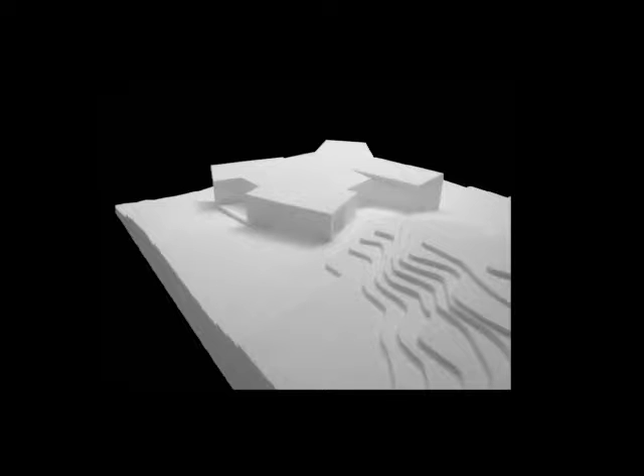But the idea of containers was always present in the project. Starting from this idea of containers, and at the same time the place which had a huge slope, immediately the house gained two faces.

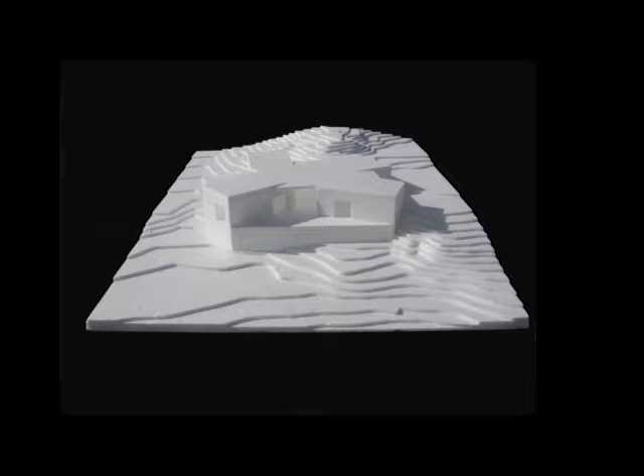One where the containers actually go inside the site, and the other where there's a balcony that connects these containers, and that makes, in a way, the image and gives a unit to the whole building. So this is more or less the idea of the containers.

But moving forward, as we had lived on the island and had this strong experience of the elements, we are completely in the middle of the ocean. We can have winds of up to 200 kilometers per hour, which is very strong. An interesting thing was that people around the islands know how to deal with the elements. For instance, when there's a strong wind from the north, people, when fishing, can always walk around the island and find a nice, calm bay that will be protected even if there's a strong wind from the other side.

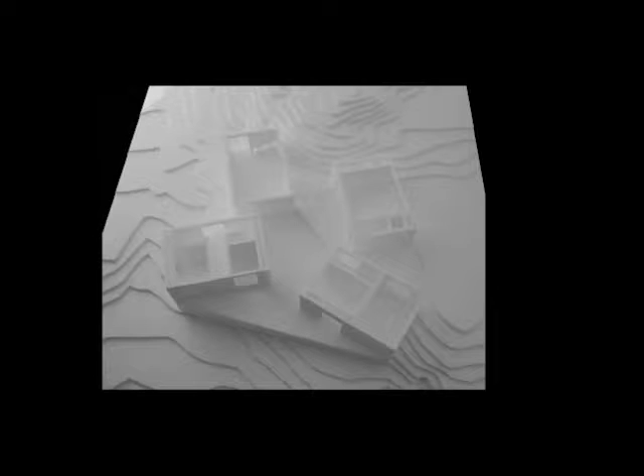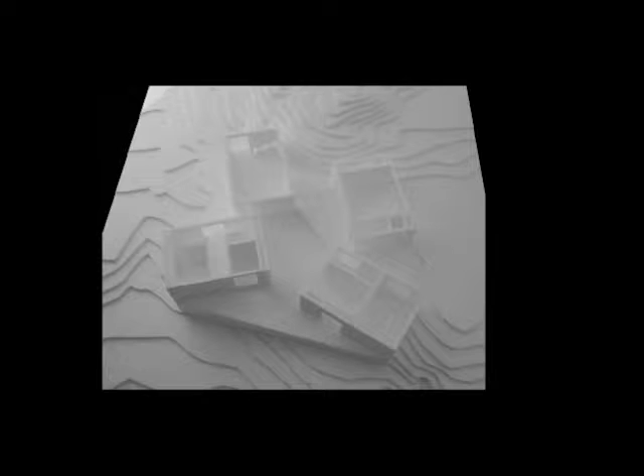So we proposed to our clients that we would build their containers, but the social space of the house would be the central area, and that this central area could be open towards the four sides according to the relevant wind. So it was an idea of being protected and being connected to the exterior, and this was the way we dealt with the containers.

But as I said before, it was very important for us that the house belonged to that place, and we had this in mind when we were drawing the plan: traditionally, old constructions were, for technical and functional reasons, arranged around like a street. They are always small constructions that, although in a completely rural context, the way they are arranged makes almost like a small urban system.

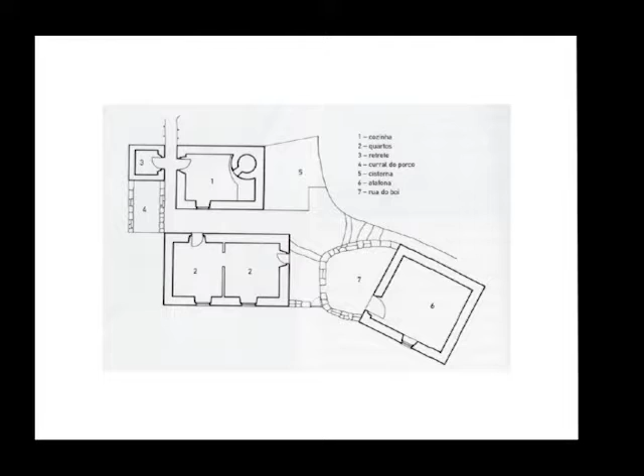They even call these in-between spaces streets, and there are functional rooms apart from others, but the whole ensemble of buildings makes a very coherent, almost urban structure. So the plan isn't so relevant on its own, but it's putting in a concrete way what we proposed to the client.

So the social area inside, the rooms for the kids, the main room, and the kitchen. Also an office was important, as he was a dentist, and the wife said that normally people, since the island is very small, would knock on their door for a small appointment even when they were at home. So the idea was that the office was closer to the entrance, so people coming to the house wouldn't enter their privacy.

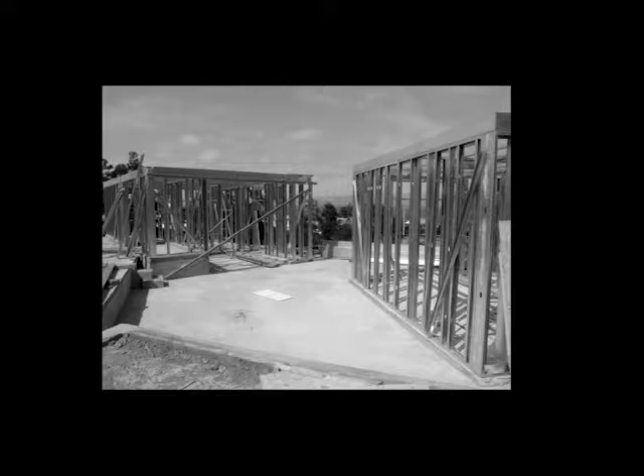This is just to show you what was, from our research, the possible prefabrication system, which was like light steel framing. This was actually good for the project because it allowed us a degree of detail that was in a way closer to how the dentist client works. So it was really possible to make the size of the volumes very exact.

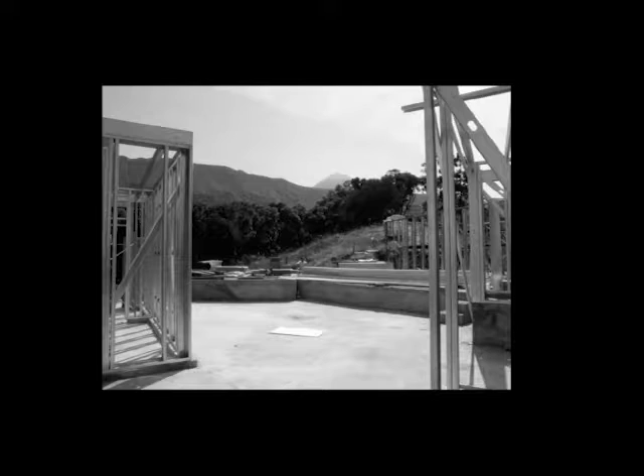Finally, all the torsions and movements that the buildings have are related somehow to the views that the client asked for each compartment. There was this kid who wanted his view toward the mountain, another who wanted to see the sea, and the wife wanted to see a particular part of the island. All the movements you see on the plan are actually trying to respond to the client's wishes.

I guess the interesting thing in this picture is mainly the fact that even if you have this prefabricated structure, which is light and dry, you always have the hard part that touches the ground. For us it's totally relevant how the buildings touch the ground—I guess it's what defines them in contexts like this.

The other part of the brief that was relevant was that they wanted the house made in wood. From our knowledge of local construction, wood is always connected to more functional buildings that normally store goods, not so much houses. So we were a little afraid that the wood would give a sense of lightness to the project that was not at all the reference we had for this building.

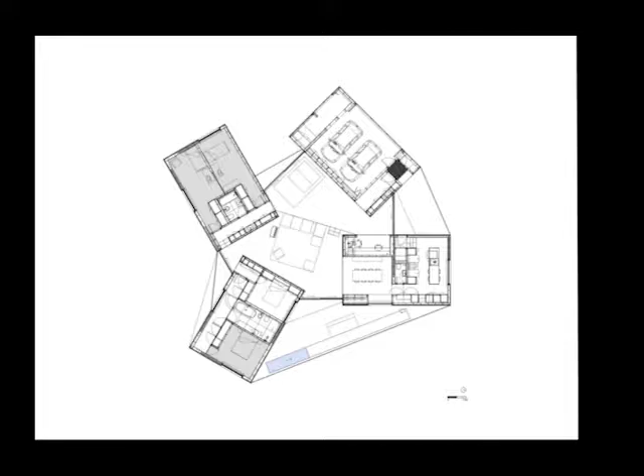So we proposed to the clients to paint the wood with a black opaque veneer. This also supported the idea that the volumes could be seen outside and inside as a continuous element, and that the glass, which is missing here and is inside the wall, is not so relevant.

And of course, this decision of having openings for the four directions would also give us very different relations towards the exterior, either because of what we see or because of our distance to the ground.

This is the balcony, which is a very relevant element in the traditional construction. We used to say this is a volcanic island, and it's a very recent, juvenile one, meaning there's no big process of erosion. The whole construction of the island is based on an eruption and the slow flowing of lava, so we always have a slope, slight or strong. For us to inhabit this place, we always have to make a flat platform. That's why the balconies are always something very relevant, because it's this act of producing a flat place to occupy.

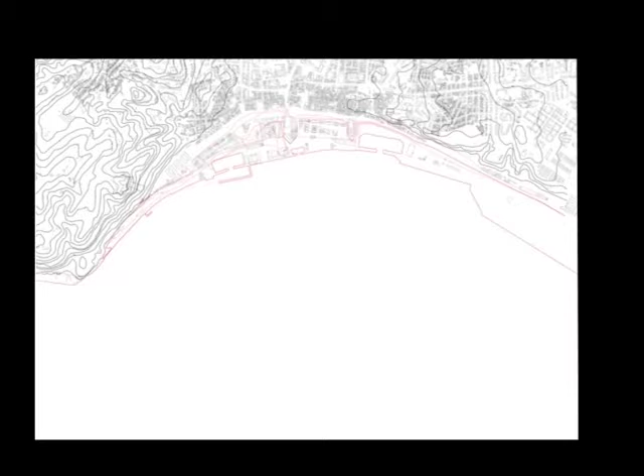Actually, we tried to identify the main elements. So we had the medieval walls, the walls from the 17th century, and the railway, this very strong line from the 30s.

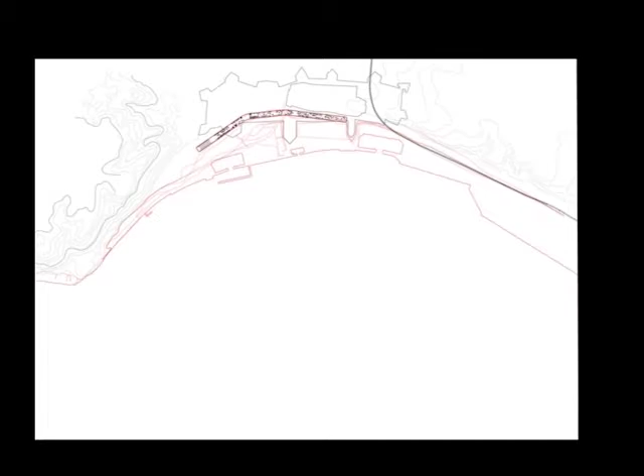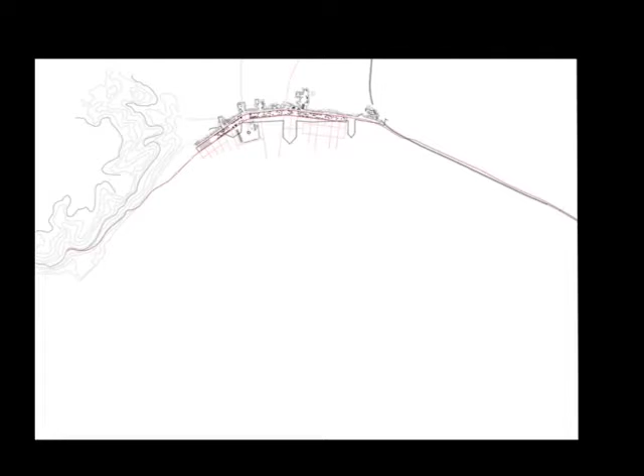One of the other main elements was, how do we call it, a public promenade that was drawn in the late 19th century. That was a really relevant element to the city because it was trying to solve the voids and the grid of the medieval occupation and define new lines of growth for the possible new city. This element was very strong, but then in the 30s there was this new line of coast.

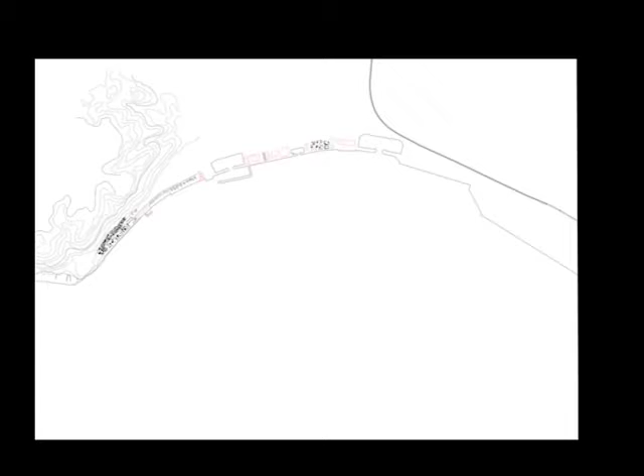This built like a totally new white canvas for the city, so the new buildings that appeared here were totally connected with this line and had no connection with the previous structure that the avenue had started. So finally what we said to the city is that we should see all this line as a new possible avenue that has to solve and deal with these two realities, the one left by the avenue and the one created by this new element.

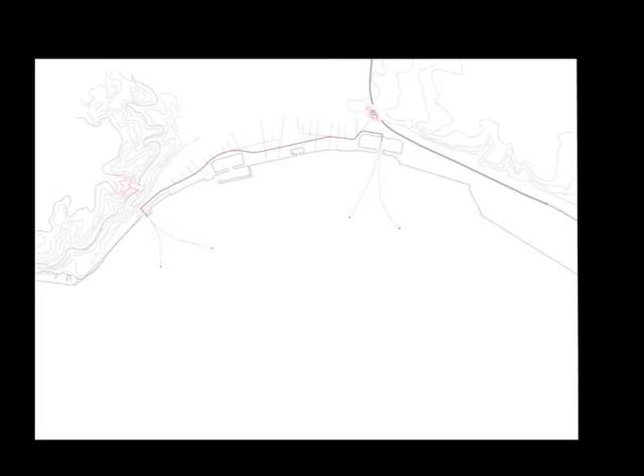So after saying this, we realized, or tried to defend, that this place could be very relevant because it was at the limit of this important line, and we have the ferries to go to the peninsula just in front. We could have here a new entrance, a starting point to the city, an arrival or departure point in the opposite way, and also possible connections to high points, as there are two hills on each side.

In a closer view, we realized we were already in a context of many landscape designer projects in this part of the city. So we were more like inside the park than inside a plot grid or a block structure in the middle of the city. We were more like a building in the park than a building belonging to a structure of the city.

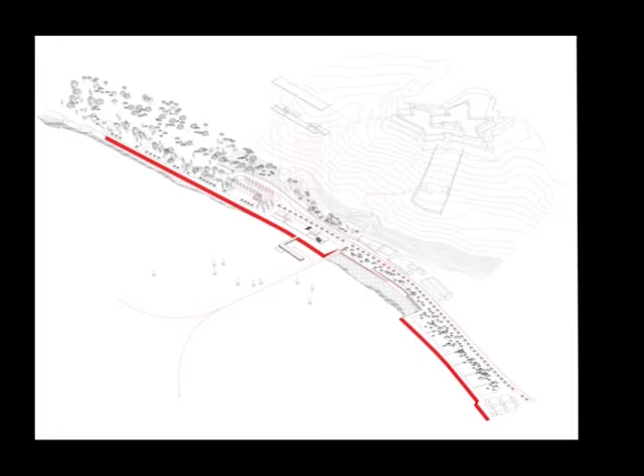So what we tried to propose is a building that departed from the idea of the two plots given by the regulation, trying to make a unique building that, although divided in two on the ground floor, had an upper floor connecting them, being just one element that could give a public square, a covered square, to emphasize the strength of this point where the hill meets the water and the city.

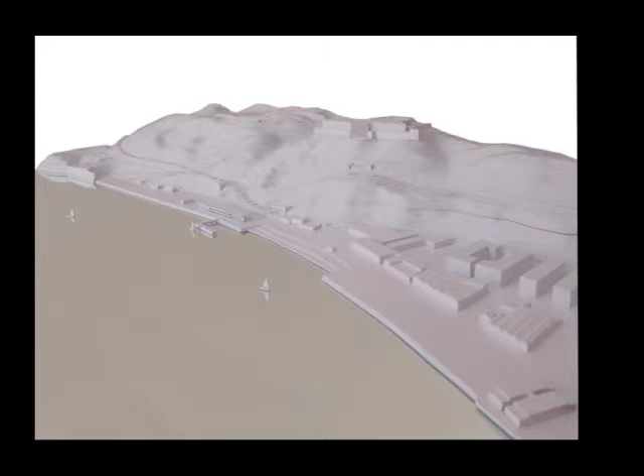You see here how strong the site is. Also the coastal is a very unique element that we have to clearly respect and not fight against. And of course the port as another main element.

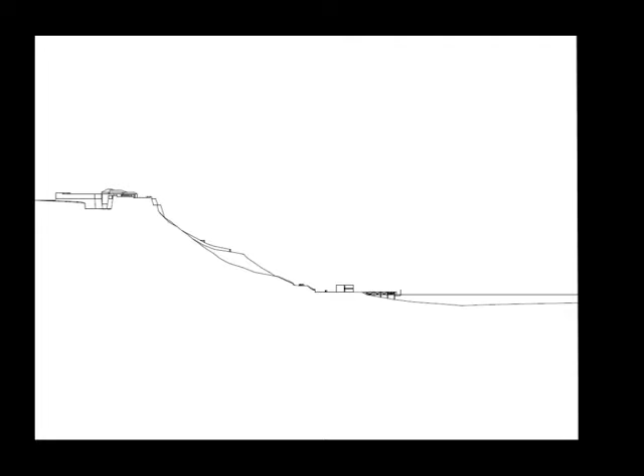We tried that the structure of the building was already somehow its solution in terms of program, and this section shows how strong this slope is, this moment where the water meets the hill. We have a two-height open square towards the mountain, and a one-story height covered square towards the sea. The building tries to play with this tension between the two spaces.

But there's so much information, so many problems to solve here that we realize the plan is a little bit strange. I guess the whole process of drawing, at least for us, is a process of refinement, testing if the first diagrammatic ideas were right and how they can be strengthened through refinement and decisions about scale, compartments, and the detailing of a window.

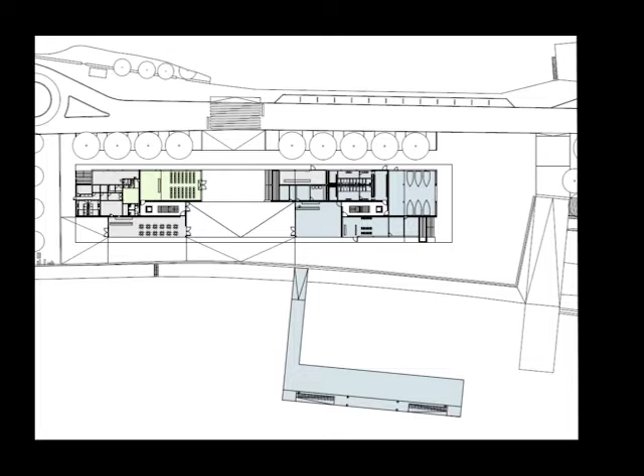And this would be like the central square. The upper floor with the remaining of the cultural program, which will be like an exhibition room just in the middle of the building. And once again, the idea of the 4 walls that both divide and connect the project.

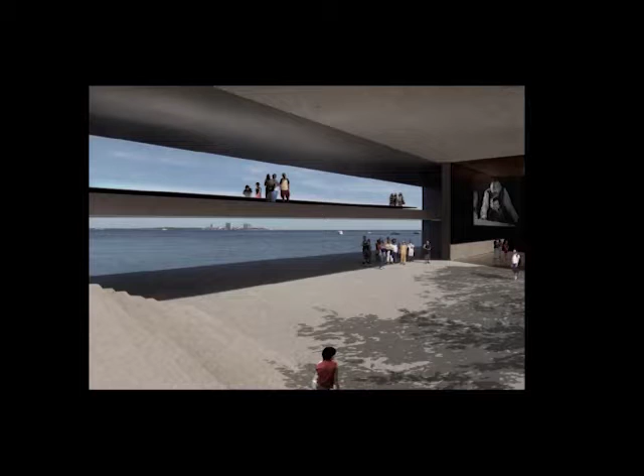A very rough image of the first presentation, where we just can feel a little bit the intentions of the project. So the 2 height square, the compressed space looking to the other side, the stairs that could be in a way an informal auditorium, a possible projection of movies in the exterior, and the main room, which was the remaining of the cultural program in the center point of the project.

And once again, a rough image of what was the idea. I guess all the process of drawing from this early image into the construction drawings will be a process of trying to test if this idea of building is right, and how the details can reinforce this first impression. Coming back to Pico Island in Azores.

This is one house that we finished last year, and it's also in the north coast of the island. But Cise House, the first house, was a permanent house, but this one is a holiday house.

So it was a couple from the mainland that bought this ruin, which is a very small one. It was a rural house, and they wanted to transform it to spend some days in Pico during the year. So when we arrived there, they were pretty much in love with this ruin and with the aspect of the walls in stone.

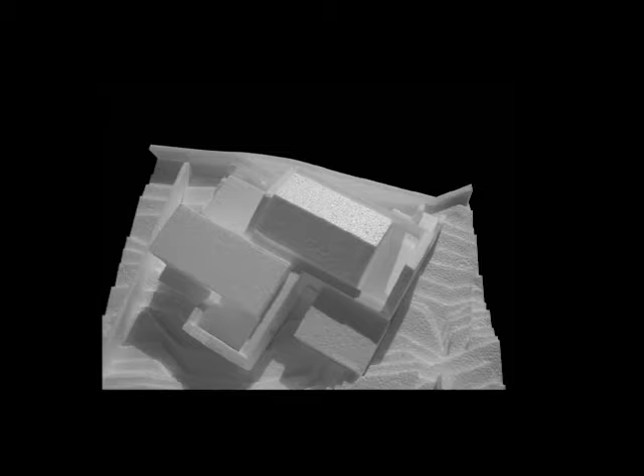And somehow we started thinking that we could really use this ruin, trying to make some new spaces, and even if the ruin was small, trying to have some exterior spaces so that we could bring more light in, but also so that we could create some new spatiality in this old and very, very small and tiny house.

So in some way, always the slope, like Miguel was saying, it's really something strong, the slope that pushes towards the sea, let's say, like that. And you really feel like your intention, you're in a very radical and strong place.

And somehow we always approached, when the ruin was like a ruin, we always approached the site from above. So we always went through the vegetation to this cistern, and then from this cistern we really could see all the ruin and spend time there with the clients many times, looking at it and wondering how it could really work.

So that's why somehow we really, in the end, put a wood ceiling in here, because the house is all opening towards north, and it was a way for people to be able to profit from south light and being there in the deck, having some sun.

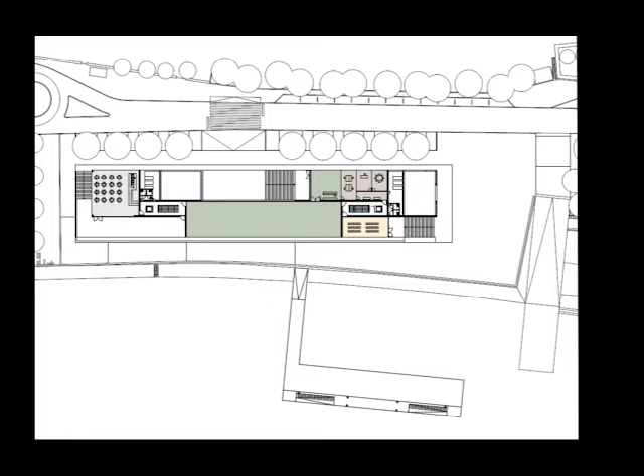It was the entrance, and then you had two rooms, and then the kitchen, which was usually separated from the main room or bedrooms because of fire risk and the fragility of old houses.

We kept the old oven because the client really wanted an old oven to make bread and pizzas. But instead of using the pre-existing limits, we made the kitchen and dining room parallel to the living room, so we could have light coming from the south, and by putting two bedrooms on the ground floor, we could create a platform.

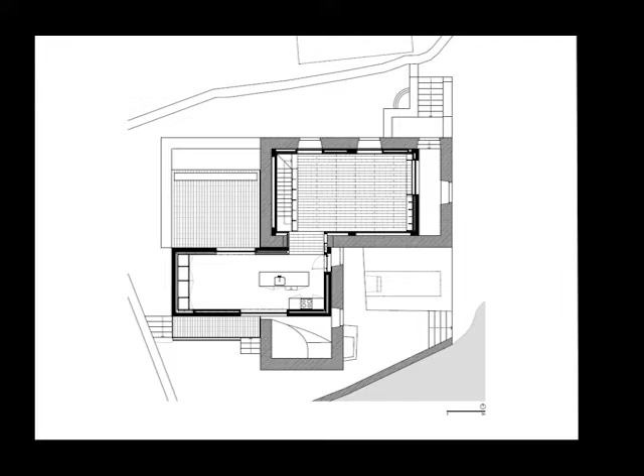So somehow we were starting with a logic of boxes that we were trying to fit into the ruin, trying to understand how it could deal with the pre-existence.

That's an image of the volume of the kitchen, the bedroom, and the dining room, and this is the living room, where we really feel what we wanted to achieve, which is the surprise. We're always trying, in an abstract way, to make architecture become concrete, not material, but become reality. And we are always surprised by the result, actually.

So we really feel we have to be flexible in the process, so that all the information and everything we weren't expecting to happen can enrich the process, and finally, hopefully, the final result.

We weren't very interested in having a direct alignment between the new openings and the old ones. We were much more interested in the tensions and the not-so-obvious points of view we could create in such a small space, really having the possibility to make it feel bigger because of the crossing views, because of the visual depth we could create through the spaces.

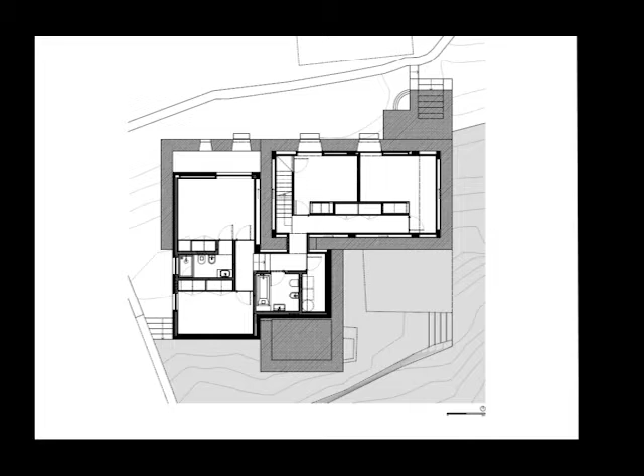So it's quite beautiful to imagine that we are adding, overlapping a new layer of using a house onto the pre-existent one. On the ground floor again, we tried to use the space to put in some bedrooms.

On the upper floor, we used local wood so it could feel much warmer, always resolving all the details. But actually, what was interesting was to have all this surprise.

So you go downstairs, and suddenly when you open the door, you find the ruin again, and you have all these different relations between these different yet similar materials - wood, stone, and concrete - trying, with simple movements and simple gestures, to really speak about space, depth, and light.

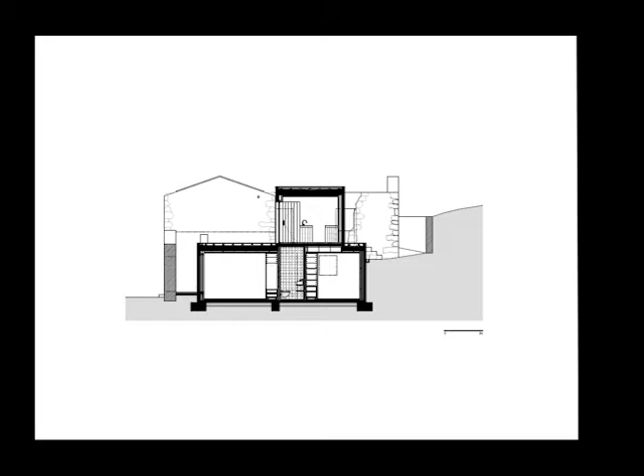And here, it's because this was actually the final surprise in the building, which was its more contemporary facade, in a way.

And somehow this makes us think about the materiality of this building. Paulo Catrica, the Portuguese photographer who photographed this building, the first images he sent us were this diptych with the stone and the concrete. For us, it's like a synthesis of this project.

A project that can age well, two really different materials that can age together, even if one was already there and one has just arrived in a way. We can, with different moments in the same place, add always new looks, thinking how we can do it with some poetry, and not only talking about construction.

Finally, to finish, and as a synthesis of what we've shown you with the houses in Pico, we think that's why the Portuguese curator of the last Venice Biennale invited us to work on the issue of the detached house together with Susana Ventura and the photographer Paulo Catrica.

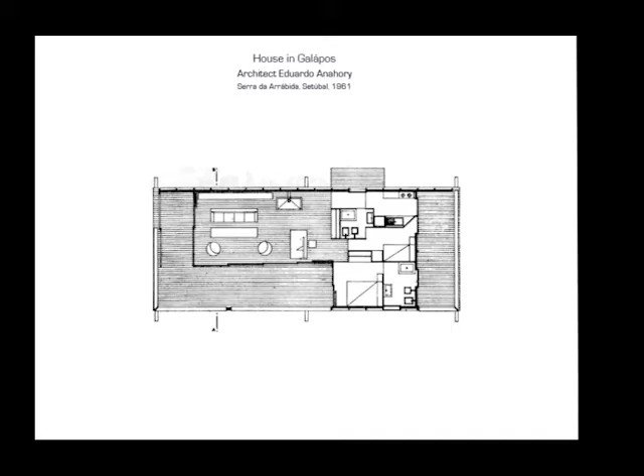Having these examples in mind, we thought, how could we deal with this idea and work with the municipality? We asked ourselves, are there places inside the city where we could still have houses that could somehow solve urban problems, not only being detached in the landscape, but having these qualities inside the city, really getting back to the city because they solve problems that couldn't be solved any other way.

For example, we chose an old quarry, an old fort, a private site where there was a pre-existing military structure, and the client had tried several times to make a hotel there, but it's not possible because you can't densify such sensitive, sensible places. There's another one by the cemetery that I'll show you, and an old fort.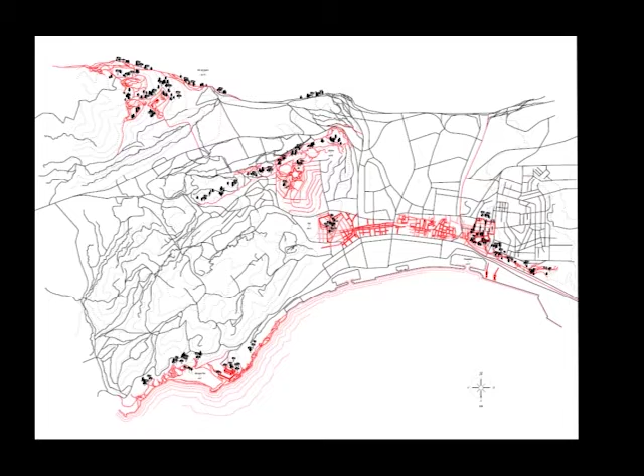So we started by designing a map of places of intimacy, as we call them - places that only with a very close regard, a very close relation with the territory, you could find. If you think about your own cities, maybe you could find some too. Of course, the topography is something really important.

So you give back to the city when you build a private program in these places, because you're really solving a problem that's really complicated, sometimes because of the accesses, other times because of the topography, but also because these points are really relevant in terms of views. So if you really solve these problems, you're really solving the city problem in a way.

So this was an example of the old quarry that I told you, and somehow we were very much interested in representing these places in a way, like here the pre-existence in axonometry, and here is a section of the place. So it was a quite sensitive map. It has different scales. It was a way of representing a place with all the things that were important to us, to analyze a place before starting designing it.

Pedro Campos Costa asked us to work on typology, to design some houses for this newspaper. And we said to him that we preferred to choose intimacy as a subject to think about the house and really relate it to the territory, so intimacy in architecture, in a house, from the territory to a room, how it could be.

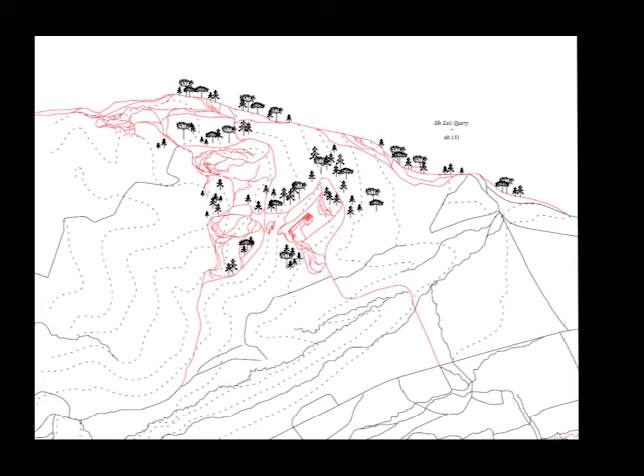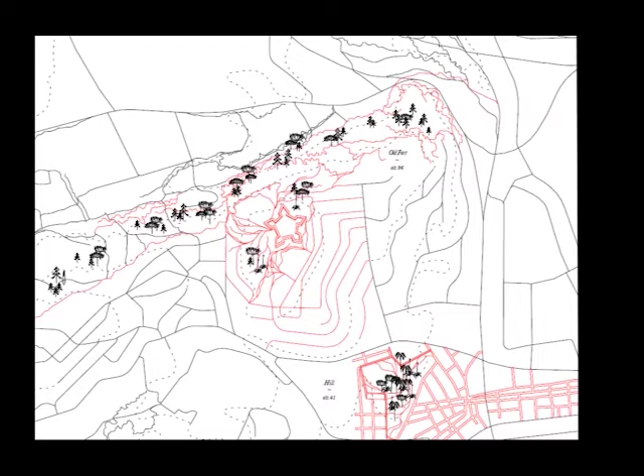So Paulo Catrica photographed, and it's like how to see a place always connecting from the interior to the city, and really with a look of intimacy in each one of the places, trying to retain the most important characteristics in each one of them, so then you could really feel that you can design a house in these places.

So an old fort. And you would be surprised when you find these places, and you really cannot imagine another program in these places, because they are so sensitive.

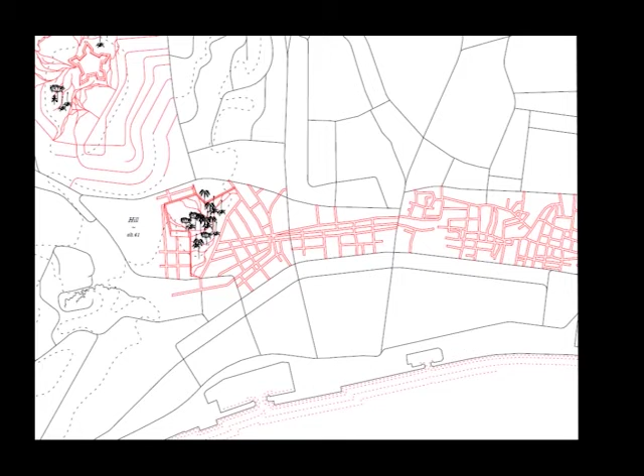This one is really connected with the last one, the quarry, and you feel like you're in nature, but you have a social housing program right next to it. In this one, it's the same thing, like viewing the city from the interior of a plot that the client carefully planted through the years, all the trees.

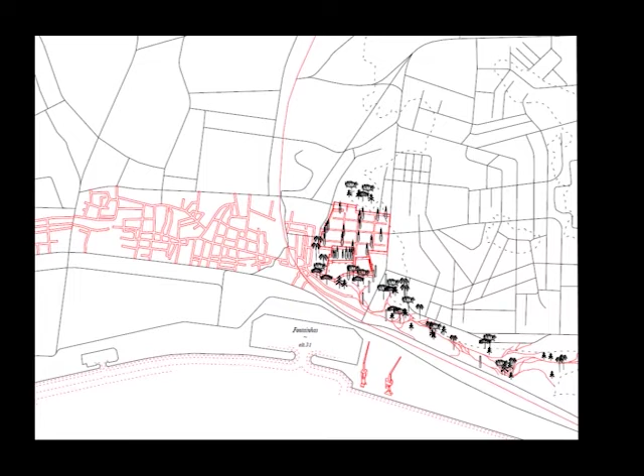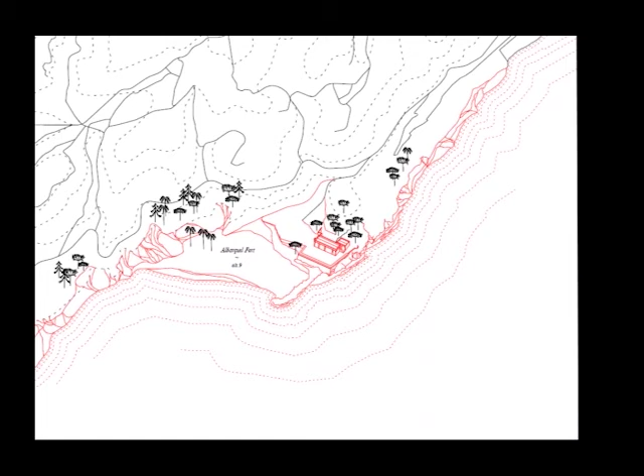This is the fourth site, which is pretty much related with the landscape and inside the city, and also with this industrial character. And the last one, an old fort, which is really at the entrance of the city, that relates to the city again, and that could allow us to think how this idea of intimacy could be related from the compartment to the territory.

So after finding these places and not wanting to design a house, because we really didn't want to get into that exercise, we asked ourselves how this intimacy issue could be really related to the house, and we tried to find it in our latest examples of domestic housing.

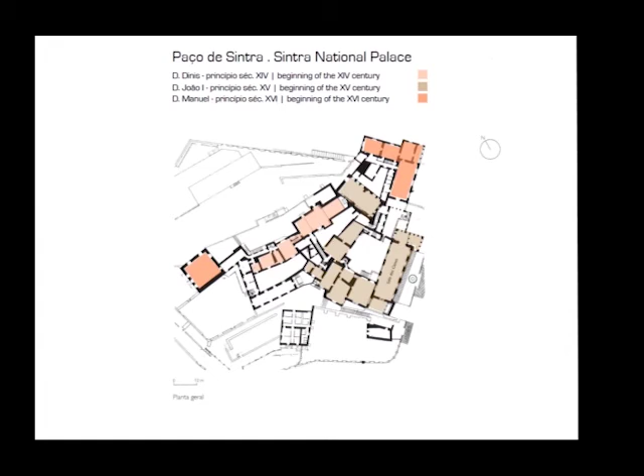This is the plan of the Sintra National Palace, a very beautiful one that has different periods. And here in the last one from Dom Manuel in the beginning of the 16th century, you really can understand this logic of the big room where everyone comes in, and then there's this increasing of intimacy each time that you move to the antechamber, the chamber, which would be the bedroom, and the transchamber, which would be the place that you wouldn't live here for anywhere else. So it is really the last place of intimacy.

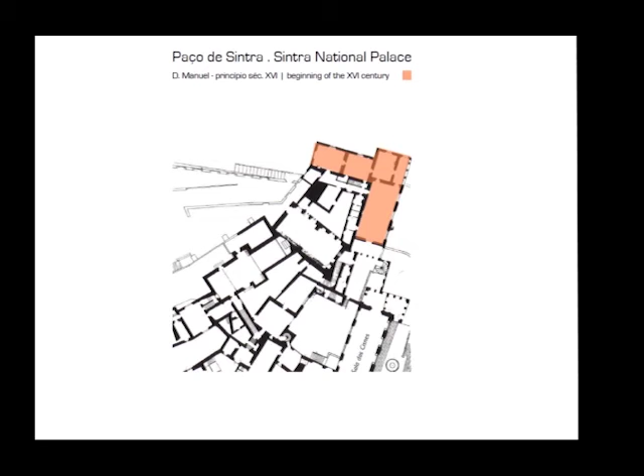So we thought that it would be a very interesting way of working, this issue of the detached house, really making a proposal thinking about the territory, and then just designing a space of intimacy.

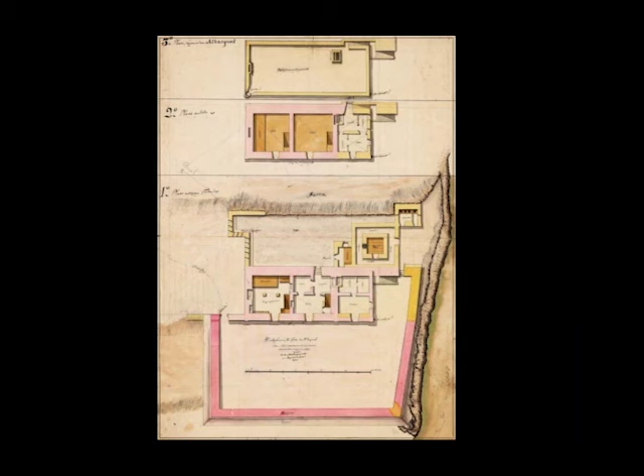And so we chose the fortress that had somehow a pre-existent rhythm and spaces that could allow us then to think about this space of intimacy, which would be actually just a pretext to design a space that could be used for every function or none of them.

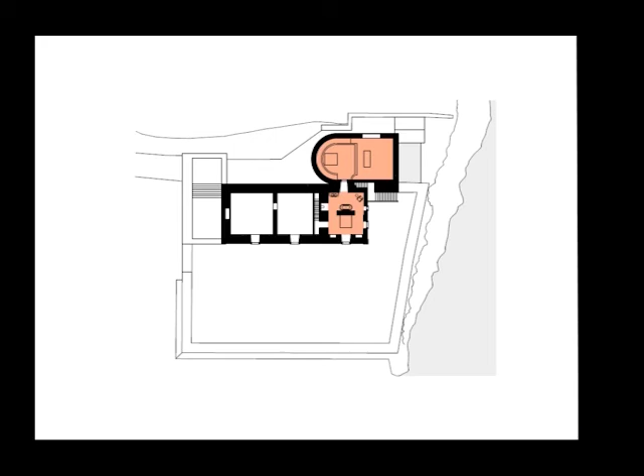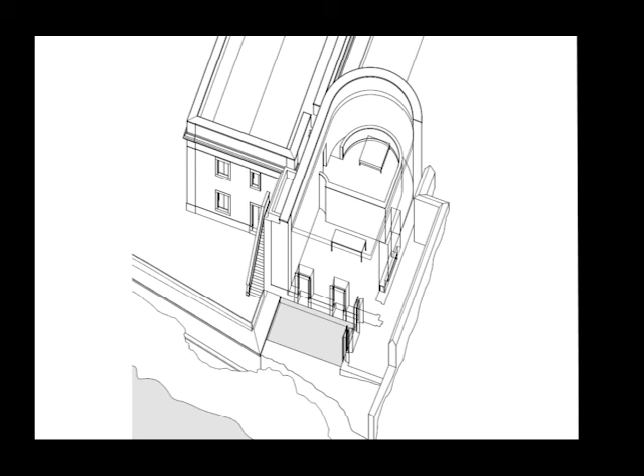So just think about how, after crossing all the house, you could really enter from the first floor and have a space that doesn't have any connection with the views, and then have a ramp that could lead you to a downstairs space where you really look and have some relations with the landscape, trying to understand the fine proportion of each space, of each window, and not being able to leave this space.

So somehow this is how we finished, really thinking that it is very important, this look of intimacy, either when you look to the territory or when you're working in a compartment, and really trying to understand each place or each time in the program, what are the very important particularities of each one.

And so in this Porto Academy, we are really, with our students, designing our own places, a map of places of intimacy in Porto, and then each one of them will be able to design their own space of intimacy.